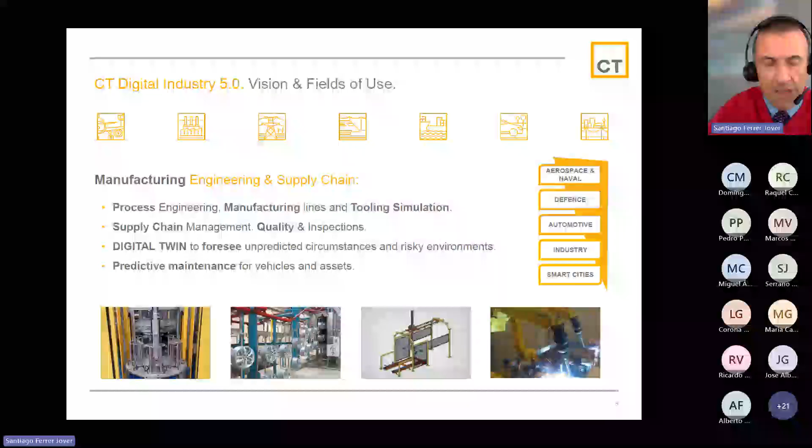Thinking about manufacturing engineering, the virtual approach can be applied first to process engineering, manufacturing lines, and tooling simulation. So all kinds of processes, lines, tools, and stations can be simulated to the slightest detail. It's very important to remark that simulators and digital twins can get information not only from the real world, but they are also able to generate their own virtual data replicating reality. That's really important as a means to train artificial intelligence. That's the core of a digital twin.

The algorithms are specially designed to learn by themselves and able to adapt and change their logic according to the input they receive. Of course, supply chain management, quality and inspections are included in the concept of Digital Industry 5.0. Think about, for example, computer vision and its capacity to identify objects and especially faults and defects of any kind. It's especially important in key sectors such as aviation, electronics, and so on. So a digital twin is able to foresee and predict circumstances and risk environments much before they happen.

It's also important to remark the approach to predictive maintenance for vehicles and assets. How good it is to know not only the operational condition of assets of any kind online and in situ, but to know in advance its evolution and exactly when a likely breakdown can occur. So all measures to avoid these breakdowns can be applied at an early stage, saving a lot of time and money and improving the user experience and customer satisfaction.

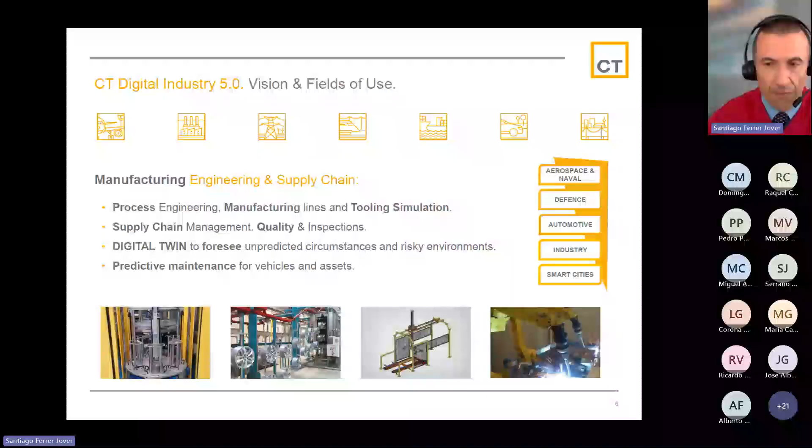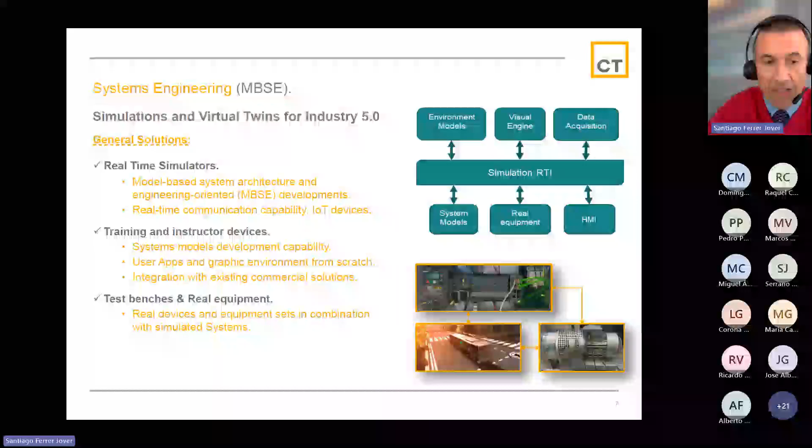And now, regarding systems engineering, one of the strongest points is the digital twin and the capacity to simulate all types of industrial processes and assets applied to industry and to everything. Among the general solutions, we highlight real-time simulators applying a model-based system architecture, what we know as MBSE, making possible the communication between different systems in real time through IoT devices. With this approach, it's perfectly possible to come up with training devices, developing system models of user applications with powerful graphic engines such as Unity or Unreal.

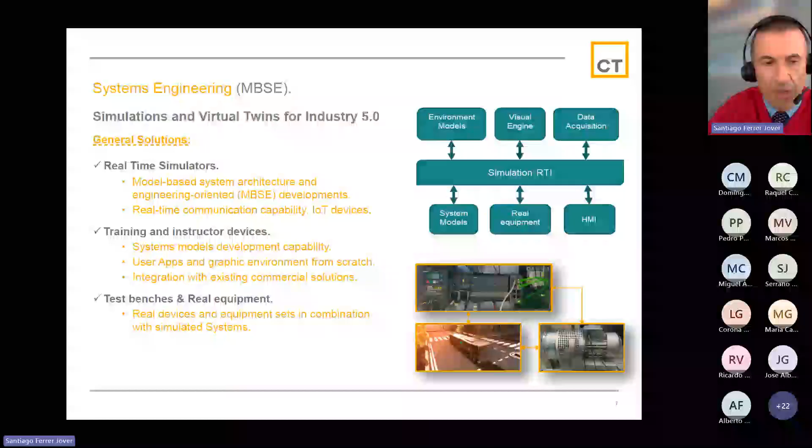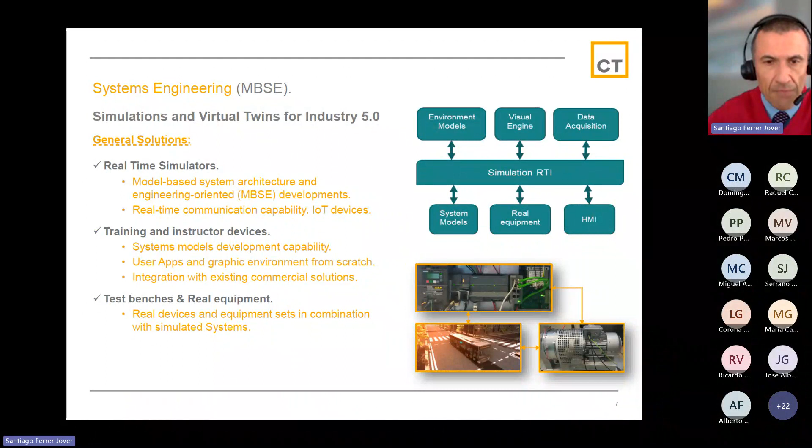So it's possible to integrate any solution that may already be in the customer's hands while combining simulated and real systems in a hardware-in-the-loop approach. Test benches can also be considered. Here we see, as an example, an electric motor, a physical asset linked to a virtual urban bus. So the combination of real assets with virtual environments is a perfect match. And continuing with the technology deployed, we also highlight the capacity to generate synthetic data from simulations for artificial intelligence training.

So we do cooperative simulations, integrating simulators from different platforms. We are capable of carrying out mission and capabilities training in the military fields as well as the civil one, and simultaneously with the help of a platform to gather all inputs from different kinds of simulators.

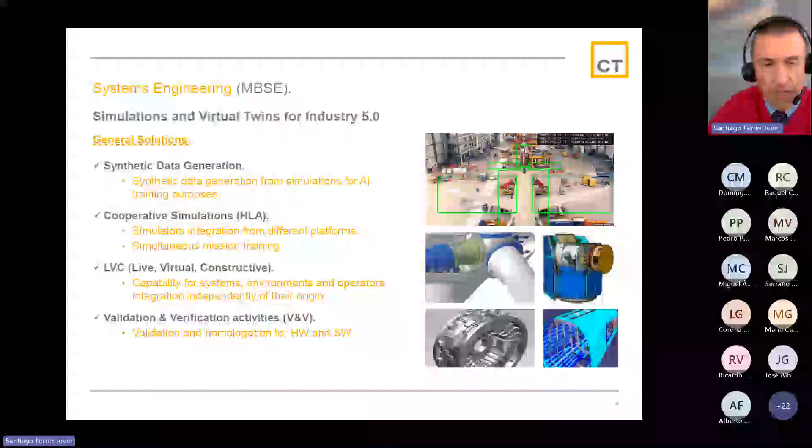So we are capable of making digital twins according to the LVC approach, I mean live, virtual and constructive, linking real entities, live, with simulated and virtual environments, virtual, and in a constructive approach to introduce new and changing environments. So finally, we do final validation work with the customers.

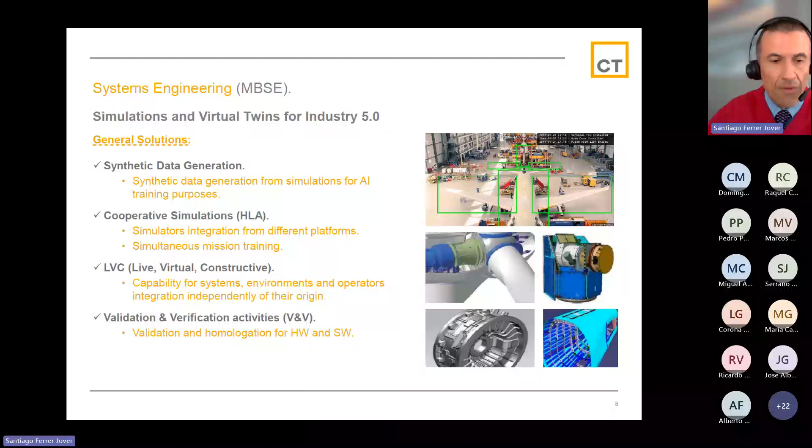And as core competencies, and also as a very important remark, we need to develop software of any kind, including user applications, databases, user interfaces, and communication between systems. We need to model any system applying deep machine learning, virtual models, and digital twins in real time, acquiring telemetry data from machines and vehicles via IoT.

So here is where it comes into play, the capacity to predict exactly what's going to happen in the future, establishing tendencies, trends of behavior, and setting the field of predictive maintenance. Additionally, we can combine 3D tools from other companies, so it's possible to get accurate replicas of testing grounds to replicate testing conditions and the real life of assets and machines.

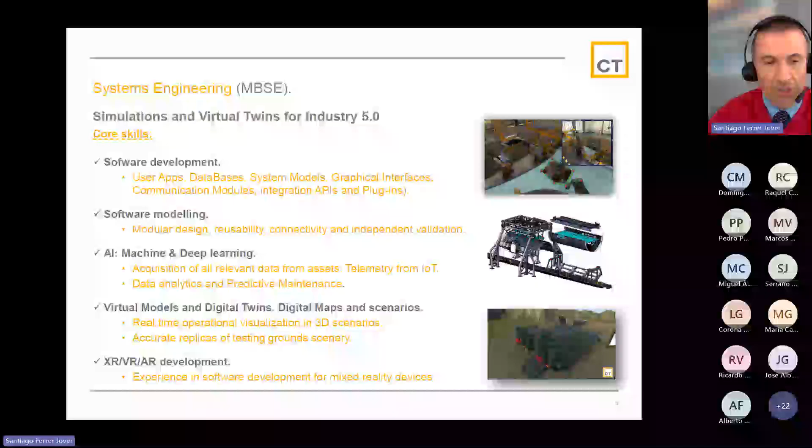And it's also a good idea to combine the display of information using augmented reality, superimposing virtual information on the real world. And last but not least, it's possible to link applications related to virtual reality to enhance training and come up with an immersive experience, really improving the user experience field.

And in terms of design, we can develop cockpits and ground control stations with HMI for industry in general and vehicles in particular, with which we have already entered the area of hardware developments, helping validation with end users. So this can be linked to remote operation and automatic driving of machinery of all kinds, with the human being acting as a supervisor. We'll see that later in a few slides.

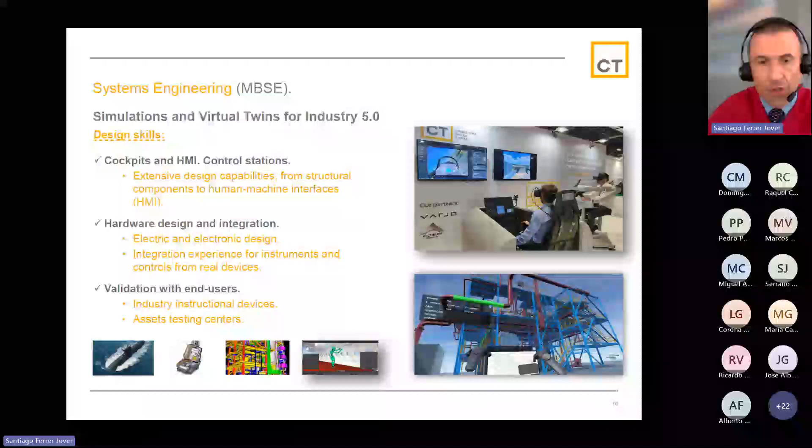Also, we should be able to perform the design of systems, and better to say systems of systems. We have to remember any system and subsystem in any asset is linked to another one, making up a whole assembly, working as one and only entity. Now comes into the middle the micro design of electronics as well. And this also contributes to the final stage of validation and verification, what's called V&V, in unison with the final customer.

And to conclude the chapter regarding systems engineering, I would like to mention a small array of transversal skills it's useful to develop. Firstly, the capacity of integration as being one of our capital know-how. The ability to make the conjunction between different systems from different suppliers and different platforms. This enables us to certify any system in front of the final customer and to perform a relevant role when applying maintenance following a user manual.

The virtual integration comes from the hands of visual engines able to generate 3D environments, and not only that, but also making possible the three most important challenges and capabilities for a virtual twin simulation. The first, hardware in the loop, introducing real assets into virtual worlds; software in the loop, introducing any solution into the main virtual twin; and finally, human in the loop, introducing humans into the virtual worlds.

So please keep in mind that the two most important powers of artificial intelligence are the ability of capturing and interpreting images, what we call computer vision, and the ability to help us make the most adequate decisions. So artificial intelligence is not going to substitute us, but to help us in our everyday work. Remember the approach of Industry 5.0, you know, the human-centric.

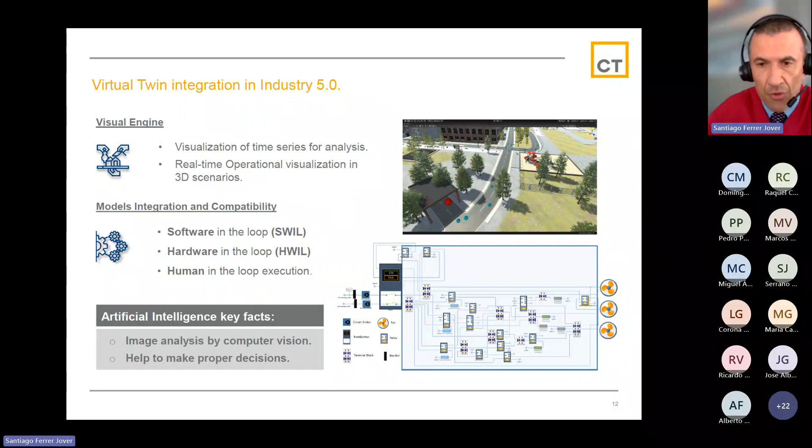In this page, on the right side, we can see the example I've chosen of an industry making the virtual twin of its HVAC system, you know, virtualizing pipelines, compressors, and fans. So regarding predictive maintenance, for me it's a very important asset and bonus in any kind of industry.

So it's a set of actions necessary to keep machines running, minimizing unproductive times due to failures, machinery breakdowns, or unforeseen stops. So the main objective is to anticipate unexpected stops and minimize downtime. But not preventive, but predictive maintenance goes further.

So by monitoring the production chain, we can know and monitor machine data such as temperature, humidity, pressure, activity times to evaluate and detect problems before they happen. So the use of artificial intelligence and deep learning allows for more effective and faster predictive maintenance management. So in the picture we show how artificial intelligence and machine learning work for failure prediction.

So all this data, those captured in real time and the historical ones, can be used to improve predictive maintenance, and machines are used to learn and detect problems autonomously, displaying alarms indicating when a part has to be changed, or in extreme cases, preventively stop the production in order to extract information, extract the knowledge, and generate the predictive models detecting when a defect in production or in quality is going to happen.

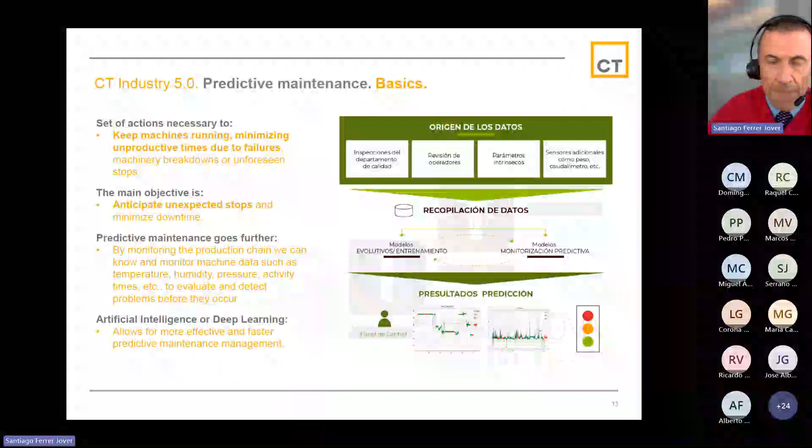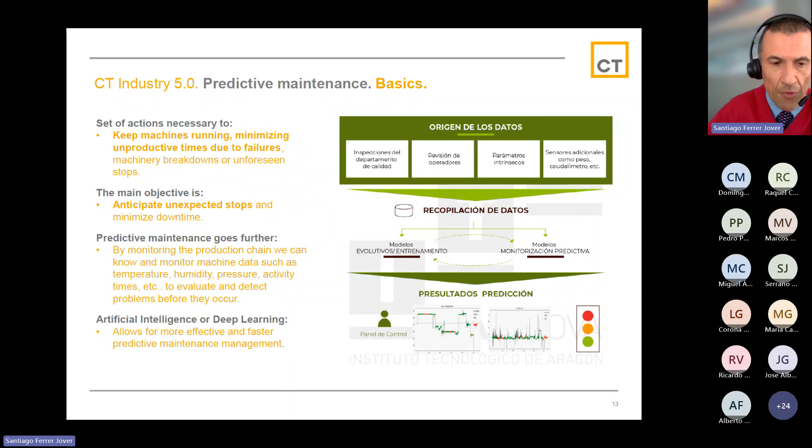So artificial intelligence and cognitive technologies are used, specifically deep learning algorithms. So to implement predictive maintenance, it's necessary to have algorithms that are continuously learning and improving the models. And this is where artificial intelligence and deep learning algorithms come in. And how it's possible to deploy.

So first, all the data considered is imported and stored, performing the necessary transformations in them. The second step is to carry out an effective exploration of the set of historical data prior to developing the models, in which the variables allowing patterns to be identified are defined. So first we took out the variables. And once we have the model, we move on to the training phase, and when it's sufficiently tested, it is deployed in the real environment.

So it works with the new data and carries out predictive maintenance, generating the necessary alerts, early alerts of failure or decrease in the quality of the parts we produce, or in the case the predictive metrics are far beyond the thresholds previously defined. So there are different combinations of neural networks, recurrent, convolutional, that can be combined to generate models that allow data to be processed in real time and provide failure predictions with high levels of accuracy.

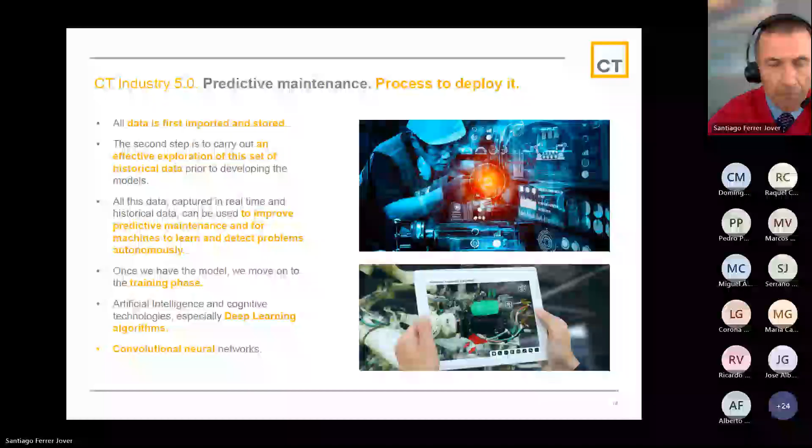So reaching this point, I would like to stop for a while and, well, I don't know if among the audience there is any kind of question, any kind of interest, comments, if somebody can ask a question or anything. Okay, so if there is no question, we can discuss at the end.

So we continue. And now going further in this section, we'll see what predictive maintenance consists of and how it differs from other techniques. So there are mainly three types of maintenance used now. The first one, run to failure. The maintenance interventions are carried out after the failure occurs. It is used specifically when equipment failure doesn't significantly affect operations or productivity.

The second one is the planned preventive maintenance. The reviews are carried out to prevent the equipment from failing unexpectedly, for example, in our car, the overhaul every 20,000 kilometers. And the predictive maintenance, in which case we need to control the performance of the equipment. Through IoT systems, we transmit the data, which is collected over time, allowing us to determine how much useful life remains for a vehicle, for a machine, for a part, for a component. So by anticipating when the machine will fail, we avoid unnecessary maintenance or unexpected failures.

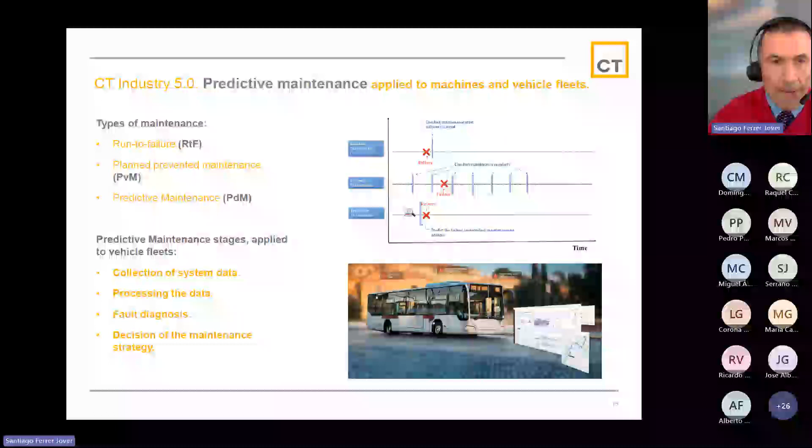And finally, the decision of the maintenance strategy. Once we know the remaining useful life of our machine, we can make the corresponding maintenance decisions. So there are 4 models to implement predictive maintenance.

The first one is the physical model approach, and it consists of a physical or a mathematical model of the system to evaluate component degradation. To be frank, it's very difficult to implement in complex environments. The second one is the knowledge-based approach, where we use expert systems or fuzzy logic. It requires expert knowledge to build the system, so it's not so affordable in some cases.

The data-driven approach uses computing power and a large amount of data. There are 3 models: the statistical model, the stochastic model, and machine learning models. And finally, the digital twin approach uses data and models, creating a union between digital and physical worlds.

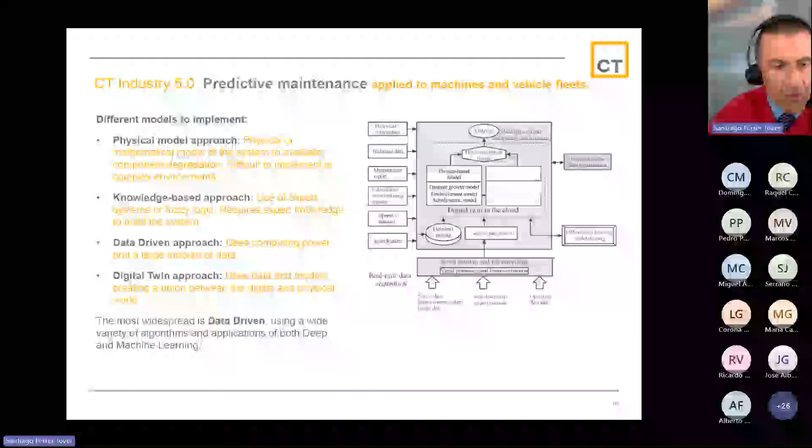The most widespread one is data-driven, using a wide variety of algorithms and applications of both deep and machine learning. Deep learning methods guarantee good performance in predicting failures, but require a large amount of data compared to traditional machine learning algorithms. And the digital twin is by far a modern technique, maybe the best, with great capacity to identify abnormal conditions and predict the useful life of the product, being able to combine physical models to create the digital twin, and data-driven, combining the information from both models.

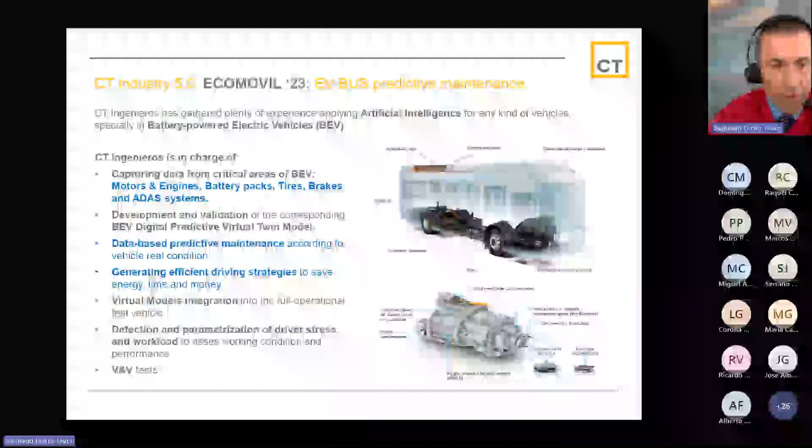Our approach to predictive maintenance allows us to anticipate maintenance operations and failures before they occur. In addition, we can design operations to improve any system. In these cases, the CT Ingenieros group is in charge of analyzing all the information available from any source, analyzing the root cause, carrying out functional investigations, developing model hypotheses, identifying relevant variables and proposing validation methods. In short, we coordinate the development of the entire system.

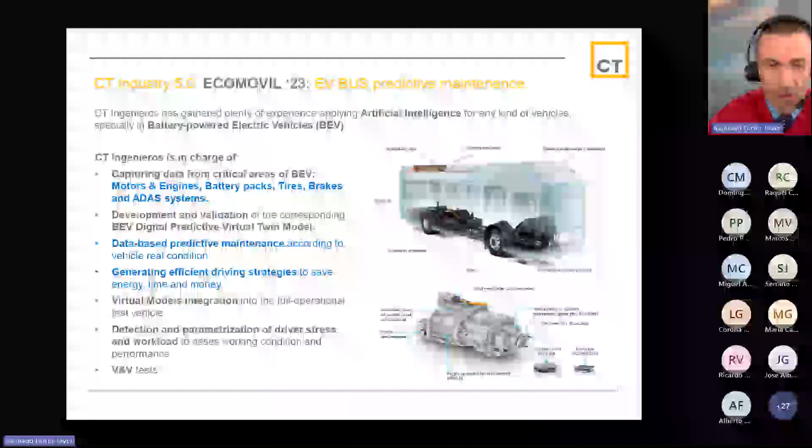The case of ECOMOVIL '23 is a good example of this, applied in this case to an electric urban bus. We can imagine the complexity of connection with telemetry, its data transfer to a database, the predictive maintenance calculation, and the final digital twin. So digital twins interacting with each other.

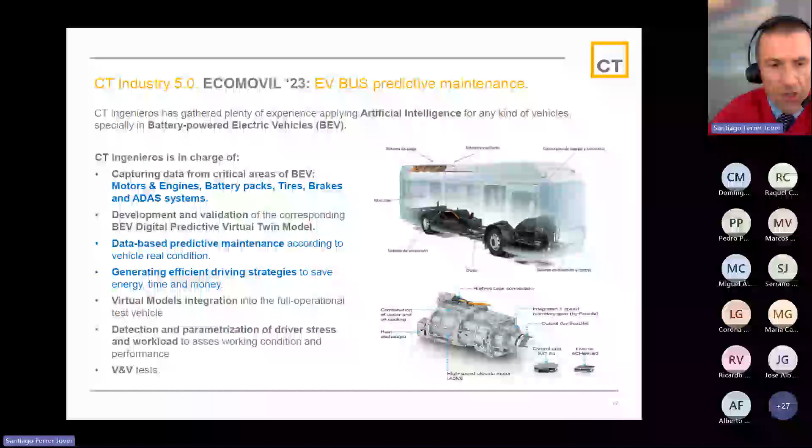In this particular case, at CT, we have chosen what we judge as the key elements of an electric vehicle: the electric motor, the battery pack, the ADAS systems for, in this case, emergency braking, the air conditioning units, and finally, the wear and tear of brakes and tires. We have first done a model of each subsystem, and once finished, the next step is to link every individual model in one single platform and play the interactions between subsystems.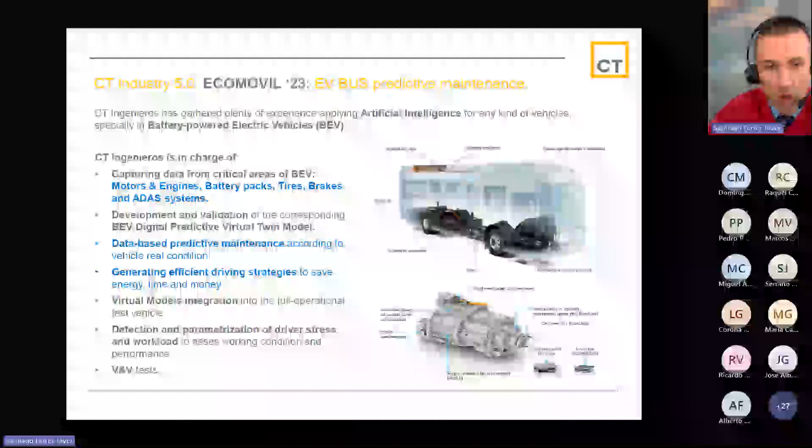We all agree the status of the roads or the style of driving can strongly affect the life of the battery pack or the tires, for example. This is linked to the economical operation of the vehicle and its efficiency. With the help of our capacity to predict what will happen to the vehicle in the near future, we can reschedule maintenance operations to the best dates. We can reduce the stop times.

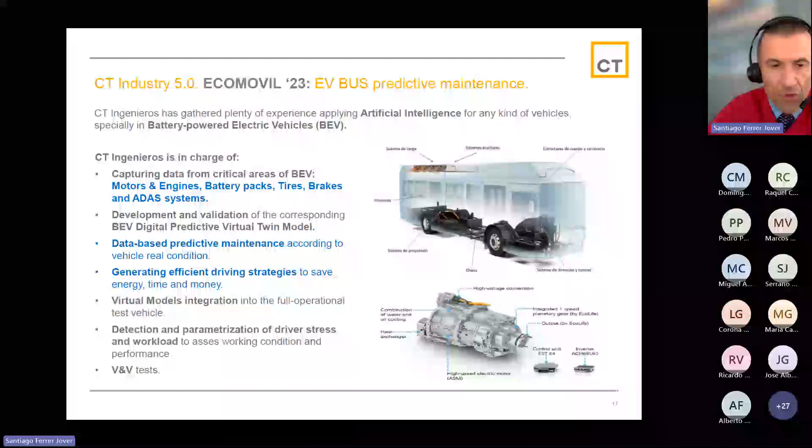We can optimize the availability of spares in a just-in-time approach, avoiding accumulating tons of parts in thousands of cubic and square meters and saving a lot of money, as well as extending the real life of the fleet of vehicles, decreasing to the minimum the stoppages due to breakdowns. We have seen the advantages of predictive maintenance in this case, vehicle arrangements.

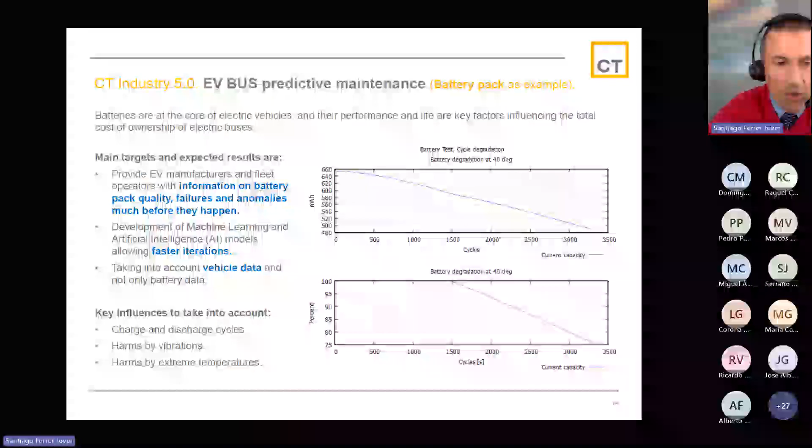If we focus our attention on battery packs in particular, battery packs can cause significant pains to public transport fleet managers. Batteries are at the heart of electric vehicles, and their performance and lifespan are key factors that influence the total cost of ownership of electric buses, and can make the difference between a successful investment and one that fails.

In this project, the objectives we have set are: first, to provide electric vehicle manufacturers and fleet operators with information on battery quality, failures, and anomalies long before they occur. Development of machine learning and artificial intelligence models that allow faster iterations. And this last point is very important: taking into account the vehicle data, not just the battery data, but data from all over the vehicle.

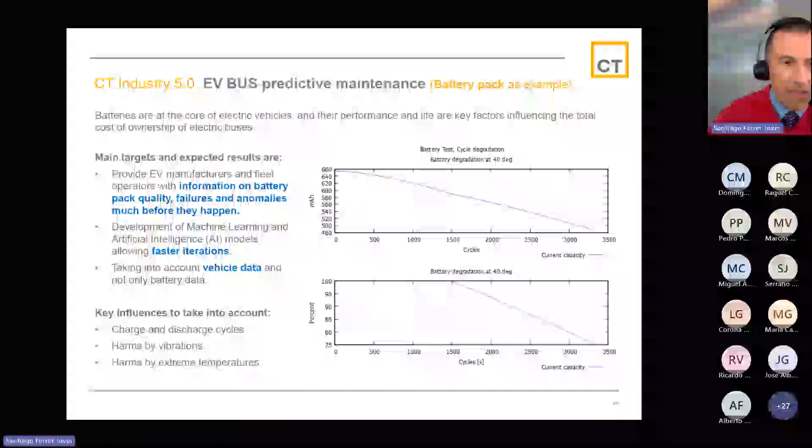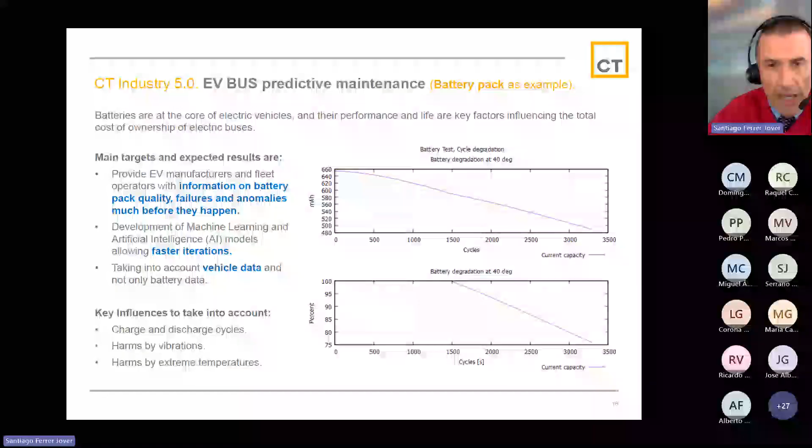Key influences to consider in the case of a battery, as an example, are: first, the charge and discharge cycles, to calculate the number of complete cycles of the battery. In this case, we have decided to use a simplified version of the rainflow method.

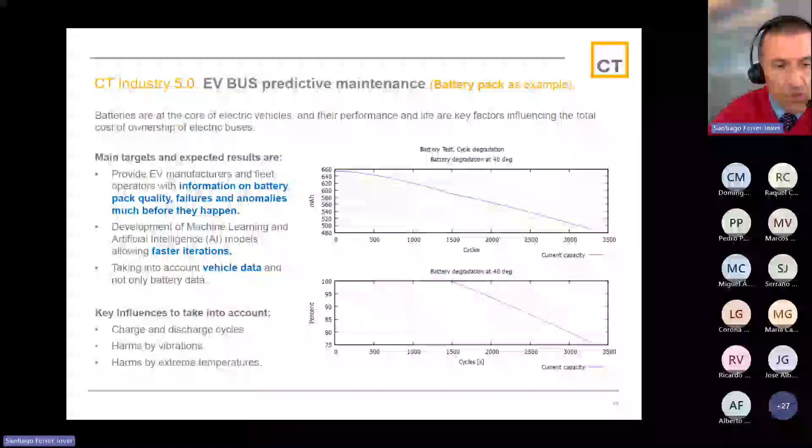So this algorithm allows you to separate the charge and discharge peaks that happen during battery operation in order to determine when a complete cycle has been completed. So once the number of cycles has been calculated, taking the specifications given by the manufacturer, the percentage of degradation is calculated. Also, we take into account the damage due to vibrations.

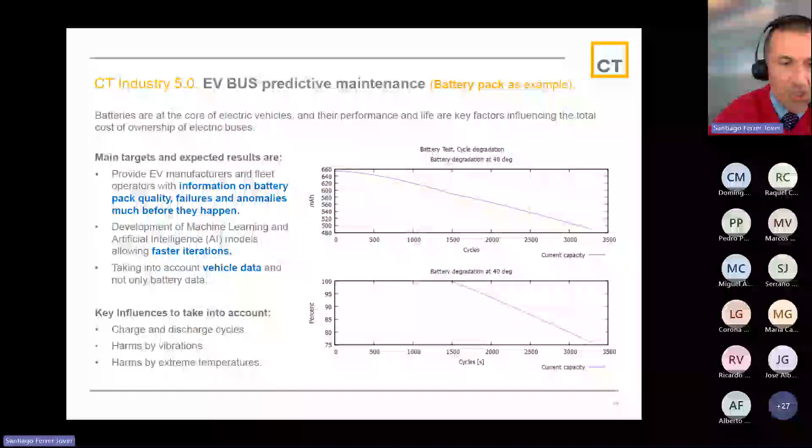For the degradation of the battery due to the vibrations during its operation, I confess it's not possible to find conclusive information at this moment, but it's been decided to use the rainflow method again to calculate the stress cycles to which the battery is subjected, taking into account the intensity of the vibrations and accordingly applying a small degradation factor. So also we take into account damage due to extreme temps.

And in this case, it's very interesting because for the degradation happening due to the temperature of the battery, it's been decided to differentiate between the instantaneous degradation at room temp or during operation, and on the other hand, the long-term degradation that occurs due to the variation of temp during the charge and discharge cycle. So first we distinguish what's happening at room temp and what's happening when we apply the cycles of charge and discharge.

So here on the right side of the screen, we see a graph of the degradation of the battery at 40 degrees of temp, depending on the number of charge and discharge cycles. As it's logical to think, as the number of cycles increases, the remaining useful life decreases greatly.

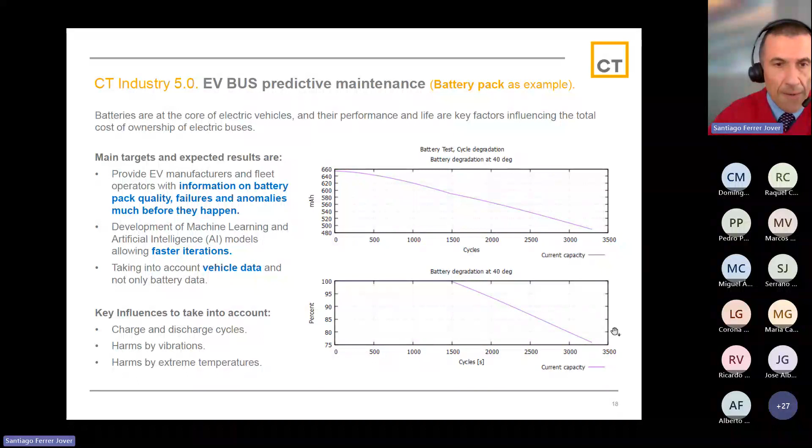So following with this example, the machine learning models developed are powered by data collected from different systems, different signals from the battery parameters. Among them, we have taken, of course, the battery specification, the battery voltage and currents, the cell voltage and current as well, the temperature and the charging status, and of course the power when charging and discharging. And the algorithms use this data to evaluate the health and the performance of the battery.

And the difference from the existing machine learning models is that instead of just collecting and analyzing the battery data, this framework from CT is designed also to take into account vehicle data as a whole system. This is important because the variables that influence the life of an electric bus battery include details like the air conditioning system and outside temp. So the more granular the data collection is, the better and more accurate the prediction will be.

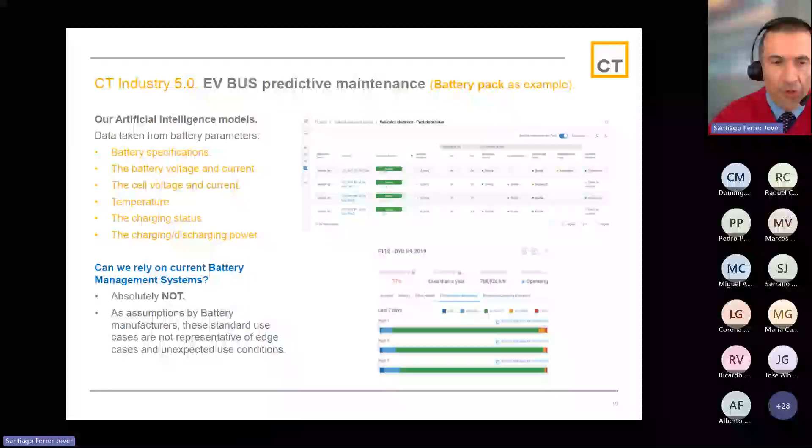So for this reason, it's essential to consider the battery in the broader context of the other vehicle components and how these interact and affect each other within the broader system. The broader system is, of course, the vehicle. So on this page, on the right side, we see user applications related to predictive maintenance. We see the useful life of the vehicle, hours until the next maintenance operation, the necessary spare parts, etc.

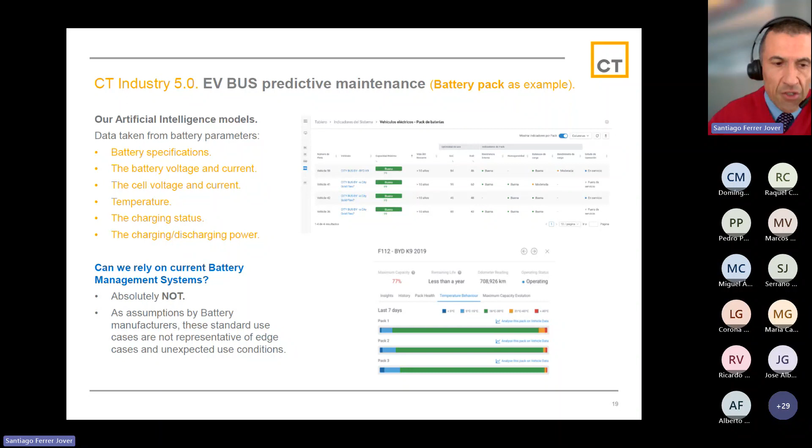So thanks to predictive maintenance, you can know in advance, based on dates or mileage, when you should replace wearing components such as the starter battery or the brake pads, receiving, for example, reports whenever there are signs of malfunction of crucial components with artificial intelligence models for detection. So remote diagnostics is like having in situ the most advanced diagnostic equipment installed in each of your vehicles, operating at all times.

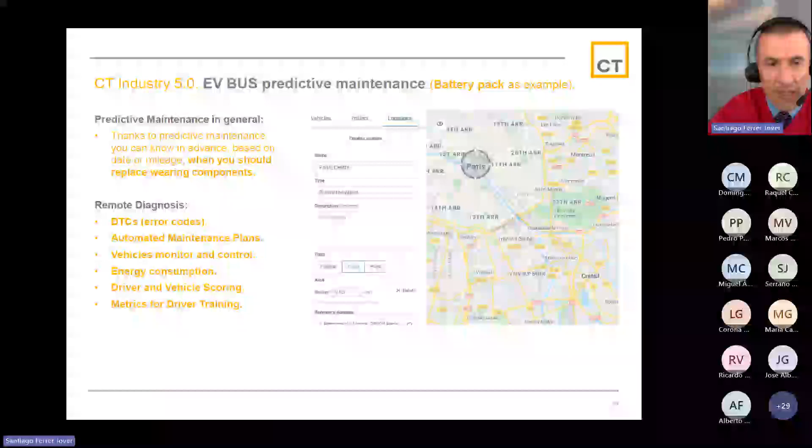So you can view active error codes, what we call DTCs, and personalize custom alerts on your vehicles based on the severity, with visibility into key maintenance metrics by comparing history and checking sensor behavior in real time, with messages, emails, or notifications.

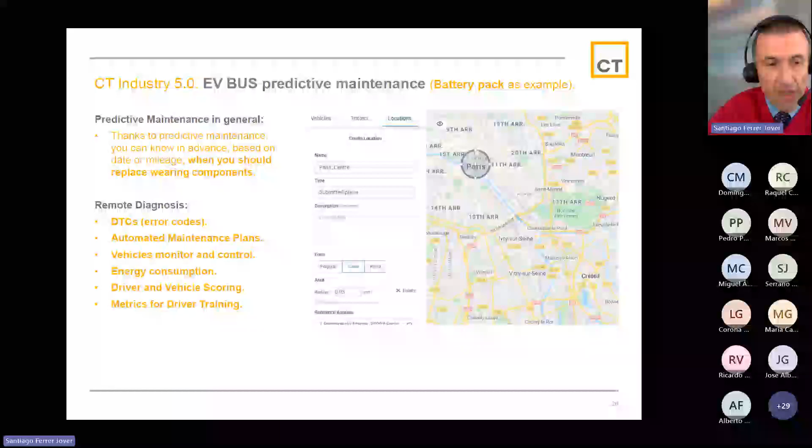So with automated maintenance plans, vehicle mileage and run times are automatically recorded, so you can receive alerts when your next service is due. Additionally, your plans can also be automatically adjusted based on faults detected by remote diagnostics and predictive maintenance. It's also possible to monitor and control vehicles all in one place in real time and on the same map, as we see on the screen. Consumption and other metrics and alerts can be anticipated based on fleet configurations.

And of course, these are the technologies that allow us to establish also a fair scoring system to ensure that drivers make our fleet safer and more efficient. It's possible through a driver identification add-on.

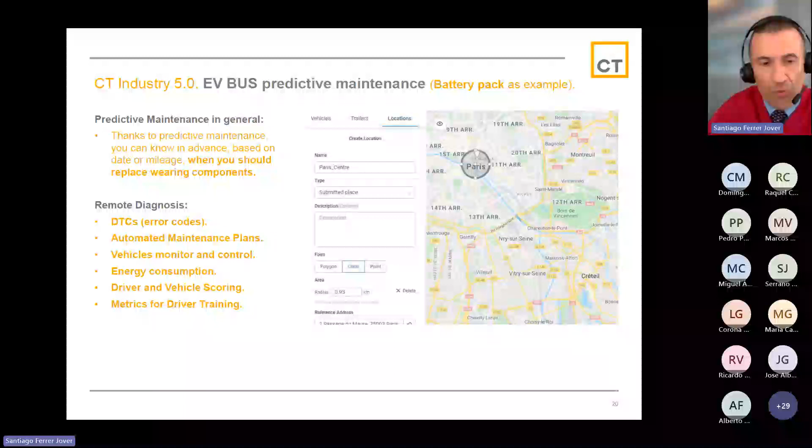So complete visibility of the fleet performance can be obtained in any type of operation. Even specific fleet training needs can be identified by being able to uncover driver performance to help minimize wear and tear of components in their vehicles.

And now, before changing gears to a smart city, to the audience, is there any question, any comments, anything from anybody? There's a question in the chat from Jose Javier Larrañeta. Do you analyze even to small component behavior level or just subsystem level? Okay, perfect. So thanks a lot for the question.

It's really interesting. Of course, the predictive models, the digital twins, can be applied to any component independently of the size. It doesn't matter if we talk about a complete system, a complete machine, a complete vehicle, or even a specific component. We have seen the example of the batteries, but we can go deeper to the case of a small cell or even components made by machining, by forging, by profiling, by any method you can imagine. So it's possible to study the behavior, not only the performance of the component or the parts.

I think about the cases of the electronic industry. Every test, every performance is previously simulated with tools like MATLAB or any tool that can be used. So it's a very interesting point, and thanks for the question. As a summary, any component independently of the size can be analyzed, simulated, and what's most important, integrated into a further system.

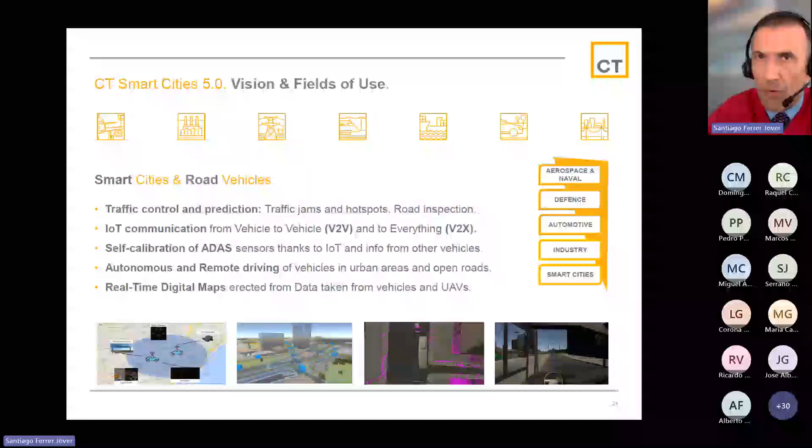And if we use only 2 or 3 sensors, for example, I imagine the case in an industry, machinery, we can think about welding machines, welding stations, mechanization stations as well. So we can rely on only 4 to 5 different kinds of sensors, and we get all the information regarding the performance and the output of this installation.

So with all this data, reliable data, we can come up with the simulation, the digital twin, and foresee what could be the future in our industry. So for me, it's worth it to invest and to install different kinds of sensors all over the installation, all over a vehicle, etc.

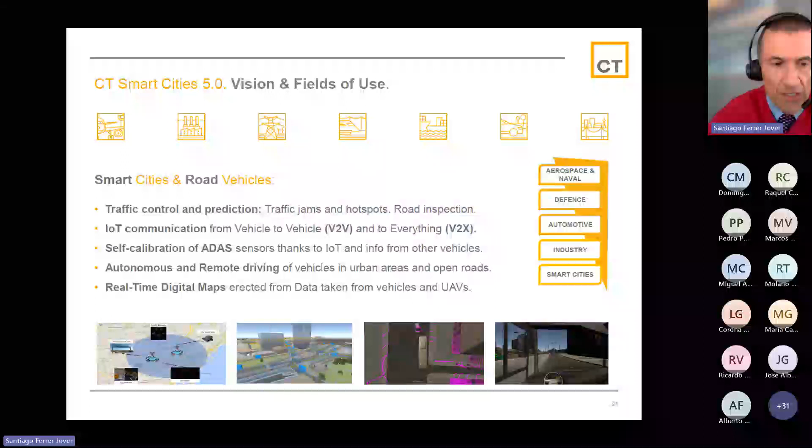The remote driving of vehicles in urban areas, we'll see later, and open roads is now a reality. It's made possible with IoT connection and the power of the simulators and the digital twins, replicating the environments, supporting extra low latency. So imagine how businesses can grow managing remotely and safely a fleet of vehicles, in the fashion of taxis, vans, small trucks. So we'll see later.

And finally, the creation of real-time digital maps from data taken from vehicles and UAVs, drones, is also possible to better plan the smart cities and factories of the future. So I insist on the fact of gathering information from the real world and combining it with virtual data generated by our digital twins. So all in all, they contribute to better training of virtual models.

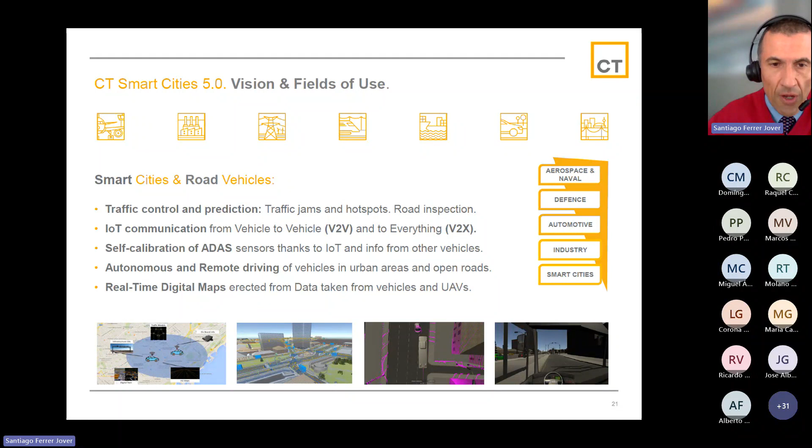So as stated before, at the beginning of this conversation, I would like to continue giving some examples of how we can contribute from the CT engineering group to the digitalization of a smart city. So I present you the project Road Digital Twin, and in this case, we use the vehicle's ADAS systems and sensors as elements to capture data and information on the roads.

So I mean, cameras, GPS sets, and lidars essentially. And to do this, we make extensive use of artificial intelligence to detect the status of key assets on our roads, such as traffic signs, road markers, traffic lights, cracks, and potholes in the pavement. So we obtain data and their status and the GPS position.

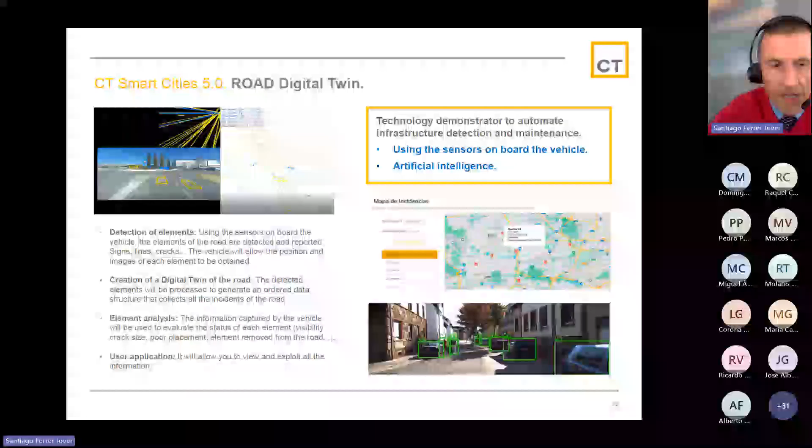So these elements are processed to have structured and ordered data, and we analyze it via big data and artificial intelligence techniques and show the data to the end user on portable devices such as a PC, a tablet, or a handy. So this allows us to develop the predictive model about the evolution of the states of the elements of roads. So we talk about a digital twin of the roads.

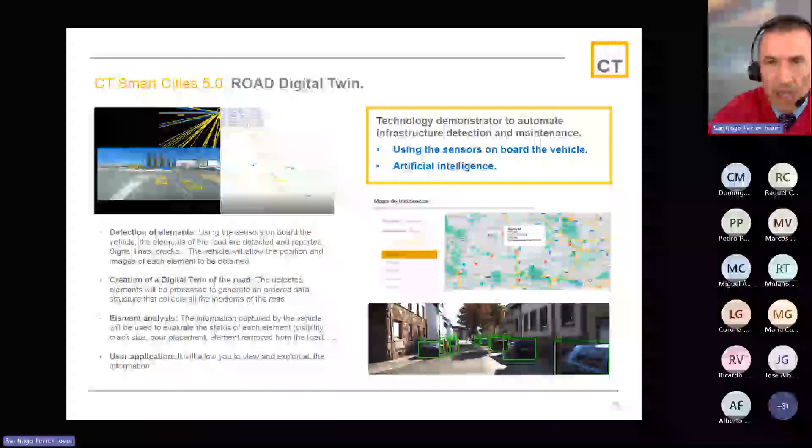So we can see on our screen what could be next on our streets, in our city, using as sensors the ones mounted in our vehicle, in your vehicle. So imagine how many observers we can take into account running to and fro. Thousands of cars can provide pristine information and become observers of what's happening in our environment.

So all these anonymous vehicles are a huge source of information susceptible to be dealt with and analyzed to get a mammoth, a gigantic set of data to train predictive models to improve, in the short, mid and long term, the condition of our cities to the benefit of safety and efficiency. So from my standpoint, it's really fantastic.

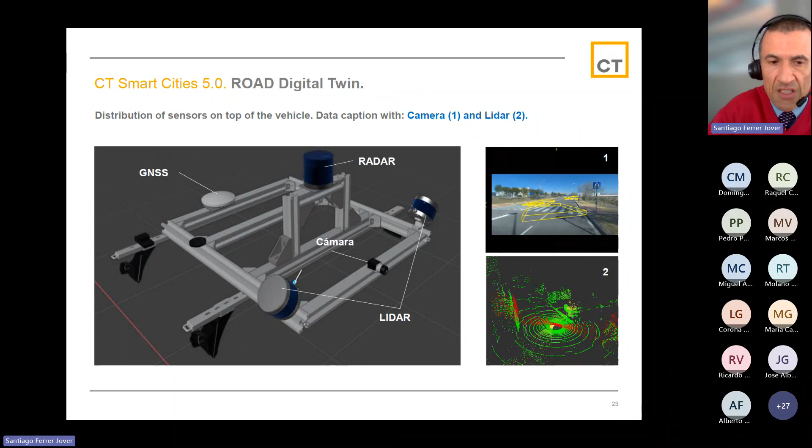The next program is what we call the bus digital twin. So here we deploy a network of IoT sensors to acquire the most relevant data from a fleet of urban buses, from basic vehicle information parameters such as the engine or even the occupancy levels to driver data and their workloads, making extensive use of artificial intelligence to extract true value from data.

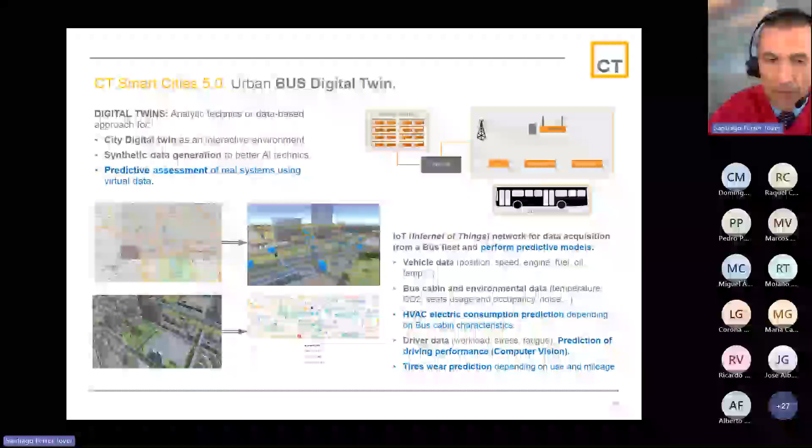So it's important to note the importance of knowing the level of stress in people. As far as we know, an urban bus in the middle of a congested city can be a very harsh environment for everyone. So our approach is to know in real time the level of tension withstood by personnel at the wheel, and specifically to train these people in the best management methods to be sure the performance at the wheel remains high and able to tackle traffic congestion.

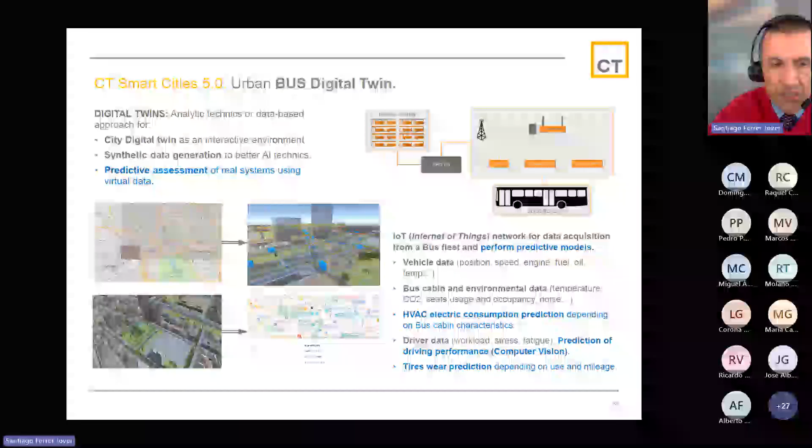So we talk about cognitive training for people and the ability to predict when and how the drivers are going to be overstressed. So with digital twins virtually replicating the bus, we're able to generate synthetic data to improve AI algorithms and establish the predictive assessment of real systems. So we can follow analytical techniques or rely on data.

And here we see a general scheme of the communications between different systems. So based on the cartography available, we generate 3D environments, and over them, we display the behavior model of the vehicle and also the pedestrians and the rest of open road users. So our system allows us to simulate different entities at the same time in a coordinated manner, generating synthetic data that can be combined with real data. So that's the power of a DT, the combination of synthetic data and real data.

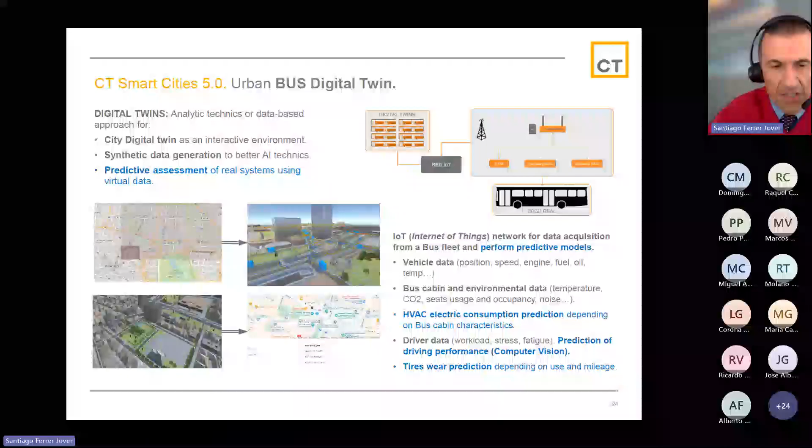So complex algorithms of predictive maintenance and fleet optimization can also be deployed. So the vehicle sensors are integrated with the smart city ecosystem, and all the connected and simulated entities interact with each other. So we have discussed the importance of the connection via IoT of sensors and the simulation in virtual environments. So within the framework of this vast digital twin, our real-time simulator shows a very realistic graphical environment which perfectly fits a human-machine interface, so that multiple test grounds can be managed in a cooperative simulation framework.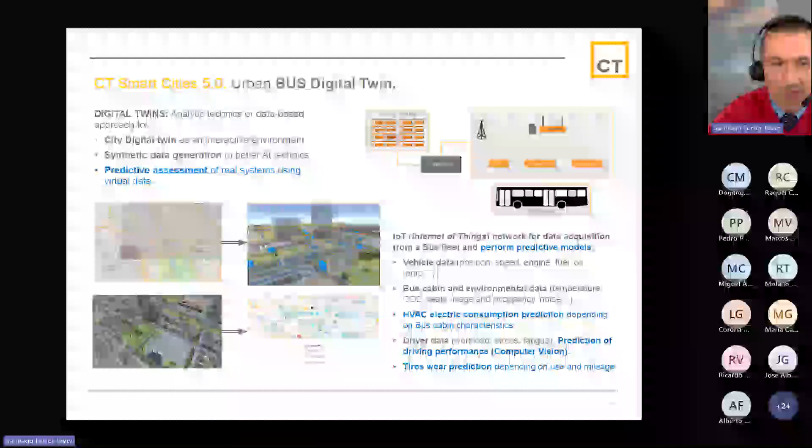So another example, the CALAIX, to self-calibrate sensors in vehicles automatically and in real time. So here we acquire data from the vehicle system, the vehicle telemetry, and we connect it through V2X and the 5G protocol with other vehicles and the infrastructure as well, in the fashion of traffic lights, cameras on gantries, etc.

So if we compare the data captured by our own vehicle, and if it coincides with the information transmitted by other vehicles and the infrastructure, the probability that our sensors are well and okay is very high. And if not, we can self-calibrate our sensors with information transmitted by third parties. So we all agree at this point that sensor accuracy is key.

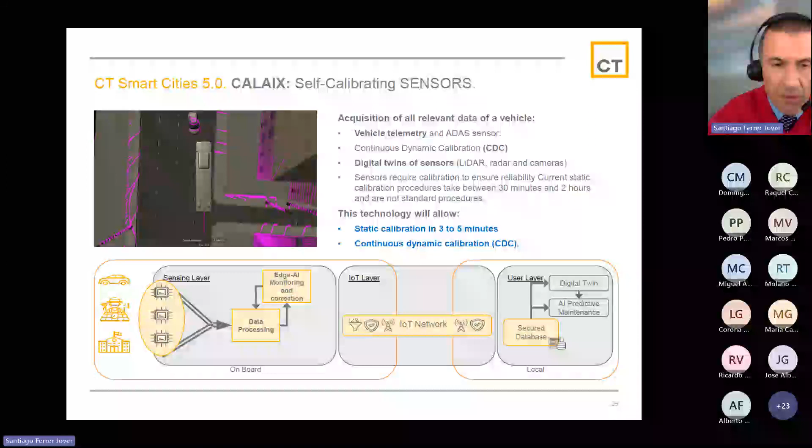And now static calibration can take up to 2 hours of downtime. So with the technology we show here, the calibration of sensors takes a maximum of 5 minutes. In addition, we can carry out continuous dynamic calibration by comparison constantly with other road users. So in this particular case, we focus our attention on the ADAS system destined to assist us in an emergency braking. So we can see the relationship and the connection between other vehicles and infrastructures as well.

So with information, with our own vehicle safety suites. So it's, from my standpoint, a clear example of collaboration between systems. You know, smart systems talking between themselves and each other.

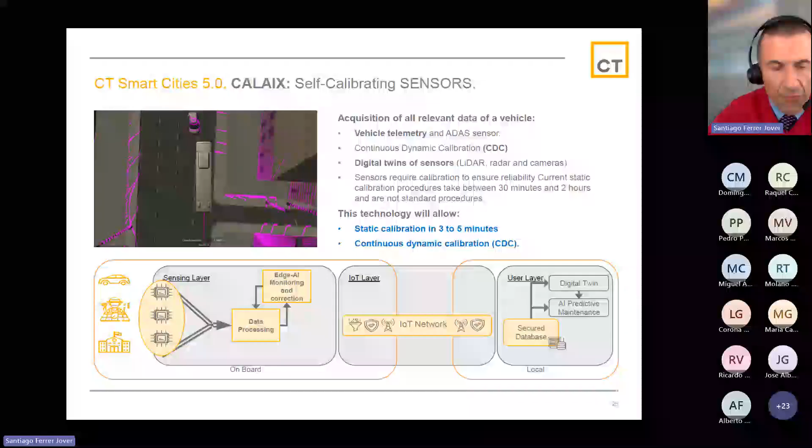So delving into the case of the sensor self-calibration, I show you the main architecture for the communications network. So linking through the communication gateways with intermediate and final nodes through artificial intelligence. So this real-time communication with databases and data outputs to the user's HMI devices. And in this case, as we talk deeply about automotive, the main protocols are CAN bus and Ethernet.

And also we are participating in the projects we call the European Eco-Mobility, in which at CT we are developing a traffic manager for a smart city. So with the data captured by the vehicles with the help of their ADAS systems and infrastructure through V2V and V2S communications with 5G protocols, three-dimensional maps of the environment. So with all this information we gather all the items to generate the traffic manager.

So we developed predictive models to streamline the circulation of a large city and thus avoid incidents, traffic jams, accidents. So making transit between point A and point B of destination more agile and faster. So significantly improving the user experience and contributing to a greater eco-sustainability.

So as we have seen, we take advantage of vehicle sensors to capture data and images from our own environments to get an exact replica, virtually speaking, of what we are seeing. So the next step is to get virtual and mapped environments so we can use for these tasks graphic engines such as Unreal or Unity to simulate our smart city. And then we can put over a fleet of vehicles.

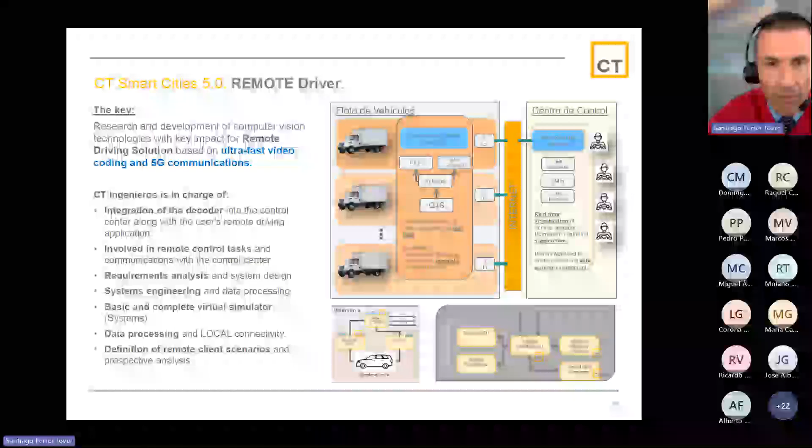So imagine the case that you are peacefully seated at your office or home and you are able to drive remotely a real car in the middle of the street, in the middle of a real city or highway, and in the middle of real cars and real city and road users, bikers, pedestrians, skaters, and so on.

So now at CT, we take care and are in charge of the communication with the sensorized vehicle, all the ADAS suites and control actuators, the remote driving station, and the communication with the control center. We are also developing a simulator impersonating the real car. So the communication protocols we use are MQTT and UDP.

And on the right side of the screen, we see the basic architecture proposed at very high level, of course, for the communications between different subsystems, so between the vehicle itself, the driving station, and the omniscient control center. So it's important to highlight the fact that it's resistant to general failures of communication, to the network, able to keep working even with poor communications, and allowing ultra low latency in information transmission, specifically referring to video signal and commands to control the vehicles.

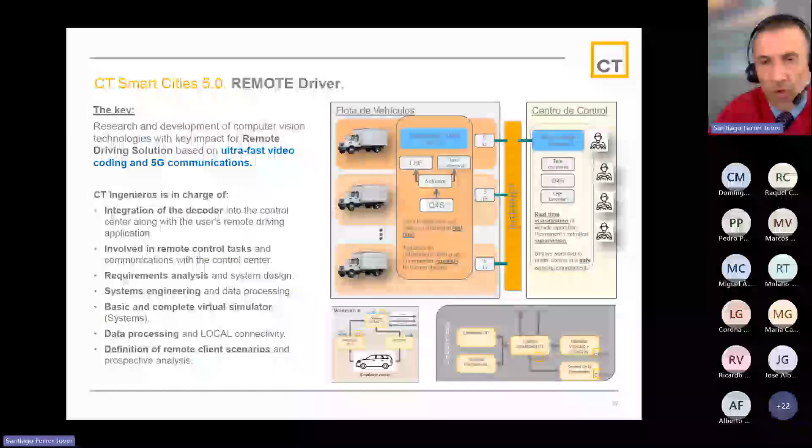So the main advantage of this approach goes to fleets of taxis, vans, small trucks, and so on. So one person, of course, cannot manage more than one vehicle at the same time, so it's obvious. But one person can switch on or switch off from one vehicle to another without elapsed times, so in a matter of a few seconds. And this, in my view, contributes to increase the efficiency of operation of vehicles and decrease, especially in transportation of goods, the legs with the truck fully empty.

So in one word, remote control of vehicles is the threshold of autonomous driving and is perfectly matched to the management of a smart city from the traffic standpoint. So we are going to make two types of simulators linked to the vehicle. A basic one for the first integration and trials of systems, and a complete one showing a complete interconnection and a very realistic simulation.

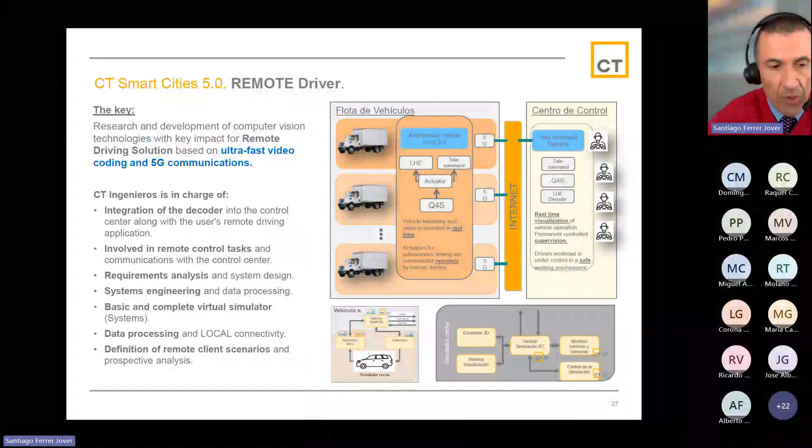And finally, just to finish and to close this session, we're going to mention the main benefits of virtual twins. Of course, quality, safety, speed, reliability are among the best and the most important ones. Benefits of simulators and DTs, digital twins. So we can increase the quality of products and process designs, as it's possible to correct initial errors from the outset. This is really important, as we can launch a product to the market or commission a machine in a faster way. So the human and machine can be introduced in the loop to assess all the scenarios.

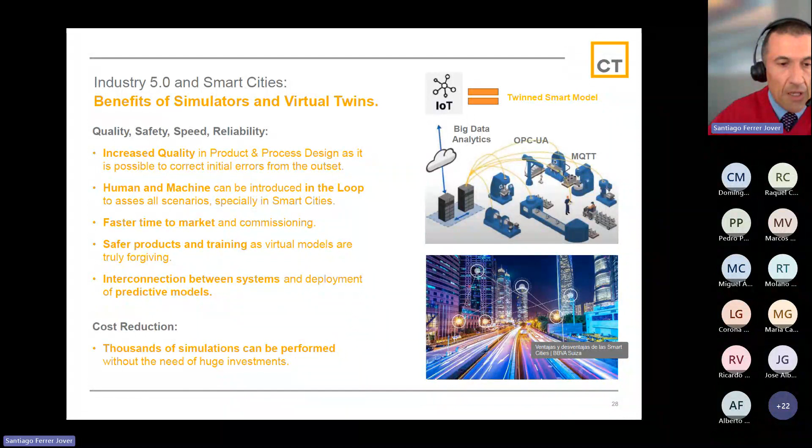So with this approach, we give the simulators all features to work in unison and not in a separate and less than useful way. All assets simulated are safer, so we can detect from the outset any kind of failures in the design and the day-to-day working operation. So in one word, the prediction of a long life. And the last message, especially for the financial areas, thousands of simulations can be performed without the need of huge investments. So the advantage of simulators over the real essays based on errors and redesigns is more than obvious and evident.